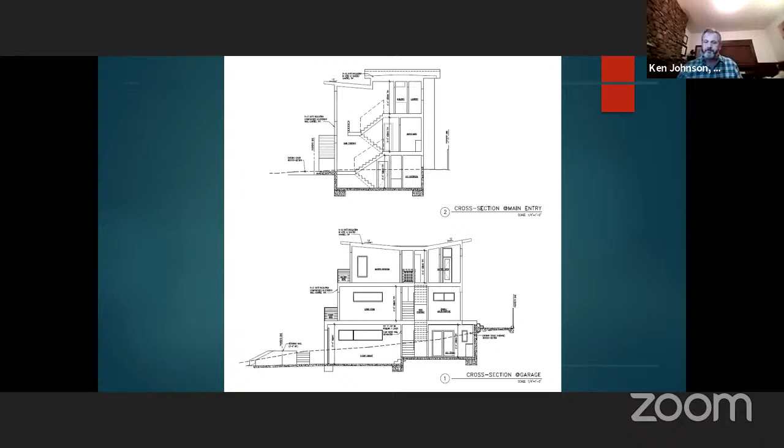As I mentioned, the ADU would also be at the basement level, and it would require a cut into the slope, but would be stepped up from the garage level, as you can see in this cross section here. So the applicant has proposed the excavation of 365 cubic yards of soil, and that's to be exported from the site to accommodate mostly the driveway, the garage, and the ADU footprint. The front retaining wall within the public right-of-way would be reconstructed, and a portion of it set back about a foot farther from the street improvements towards the house. This just shows an outside view of a couple sides of the house.

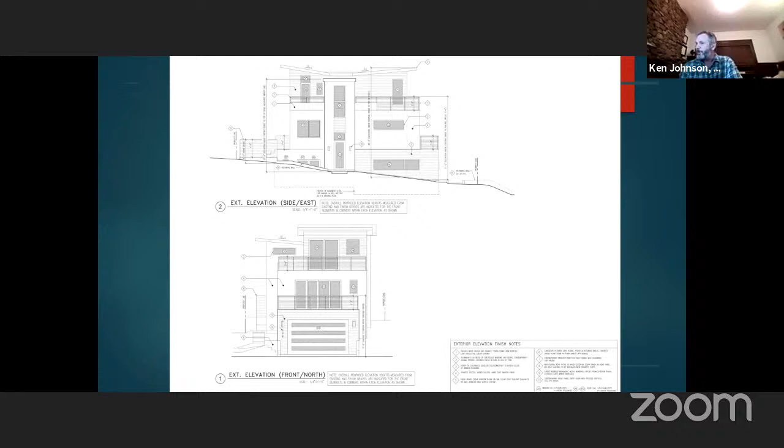The proposal complies with all applicable development standards and would eliminate the existing nonconformity for parking as well as the nonconformity for lot coverage. And that is that it's at 49% coverage, it's over the 40% development standard. The table of the key project data was provided in your agenda report, and the project meets all of the applicable development standards.

In terms of findings, to provide a recommendation to the city engineer, in 2003, the Planning Commission adopted guidelines, which included 4 findings. 2 of those are not applicable since they pertain to properties, in one case within the San Bruno Mountain Habitat Conservation Plan area, which this site doesn't sit in, and also a removal of street trees or protected species or 3 or more trees.

The other 2 findings are that the proposed grading is minimized and designed to reflect or fit comfortably with the natural topography, and the proposed grading is designed to avoid large exposed retaining walls. And the proposal meets both of these findings. There are no large retaining walls. The largest wall would be the reconstructed wall of approximately 3 foot, a little over 3 foot, at the front of the site.

On the finding of grading being minimized and designed to reflect or fit comfortably with the topography, both the garage and ADU would be within the cut area to be partially below grade. So this modestly sized house would be nestled into the lot. The topography outside the footprint of the house will be largely unchanged. Grading is also minimized as appropriate to meet the height requirement of the house of 28 feet and is stepped up to the rear of the lot in the ADU area.

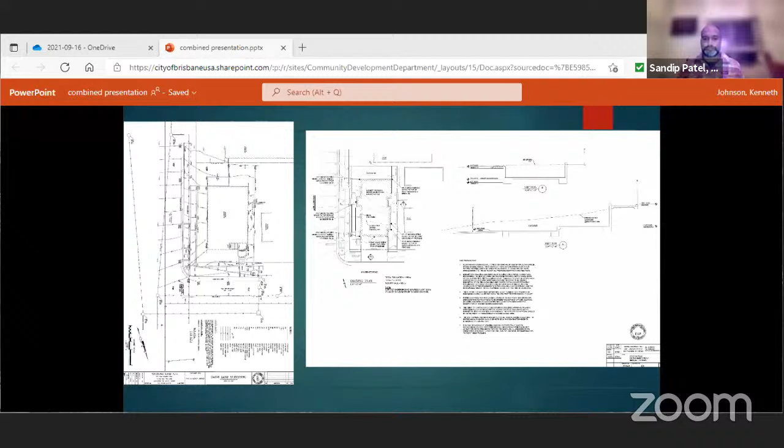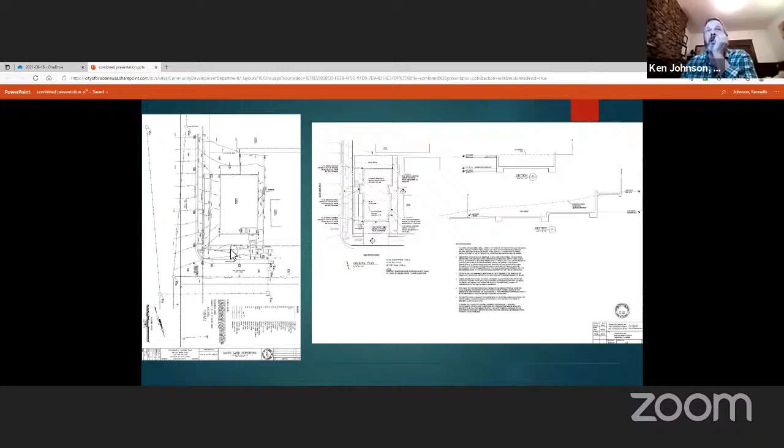All right, so can you see the screen share now? Yes. So the property line is here, where my cursor is. The existing wall is out at this light colored line here. This is the existing site plan. And so it's going to be shortened because you'll have the cut for the driveway, and it's going to be pushed back about a foot and a half, roughly. So it'll be a little bit closer in. Do you know approximately how many feet it goes into the public right of way, if you had to estimate? I believe it's about 2 feet. Okay.

So Pamela, I understand what you're saying. I do agree that we need to be consistent. My analysis was that property with the non-conforming garage seemed to be a completely non-conforming structure that wouldn't be approved today at all. They were rebuilding a house and leaving sort of a shack on the property because they didn't want to build a garage into their plan. Versus this, where there's a retaining wall 2 feet into the public right of way, which may not even be there if the engineer says they need to move it or fix it.

But the entire building and all of the structures where anyone would be or put a car is conforming. And the driveway, I don't think they need that sentence in the agenda materials. The parking does comply with what's required of that structure. If they hadn't put that sentence in there, it's an issue with any driveway in Brisbane. Yeah, I tend to agree. If the development itself is conforming, I think our jurisdiction about that kind of stops, because this is coming before us on a grading permit, not a building permit or design plan. True.

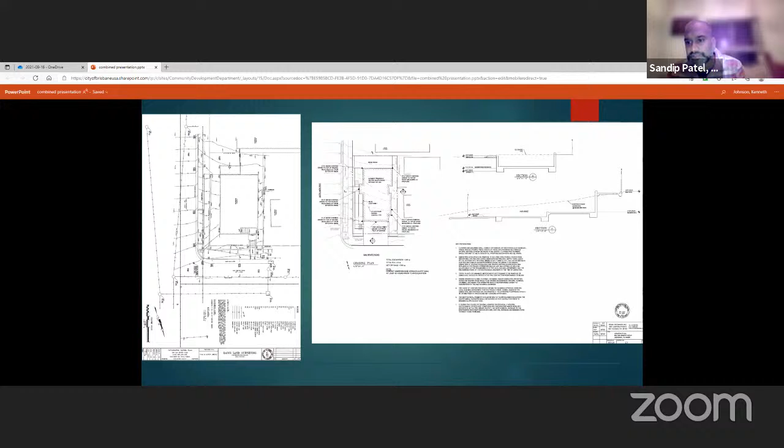I don't disagree with your concerns or the problems we have on these narrow streets. I just think the way the grading permit review criteria are written, we don't really have the latitude to act when the property is otherwise conforming. Right, I would just add that the consistency comes in because we have to address public health and safety. When we were looking at the Yu project with the non-conforming garage, where there may be people or things inside, there's a public health or safety issue.

I do agree that parking cars in driveways and making people walk in the street is a public health and safety concern, but I think that's a universal Brisbane issue and not just this particular property construction issue.

Yeah, and if I can add one more thing, I think staff and council and other folks are aware generally of issues that exist around the current criteria for grading permit reviews by the Planning Commission. And I think this permit application just highlights one more time what the issues can be that require some review and some consideration about tweaking those. But I don't think that this particular project can be held up under the current standards that we are laboring under.

Okay. All right. Where are we? I believe we've closed the public hearing. So now may I have a motion to act on this item? I'll move. To do what? Can you state your motion? Sorry, I'll move to approve 2021-EX-3. With the adoption of the proposed findings, I assume.

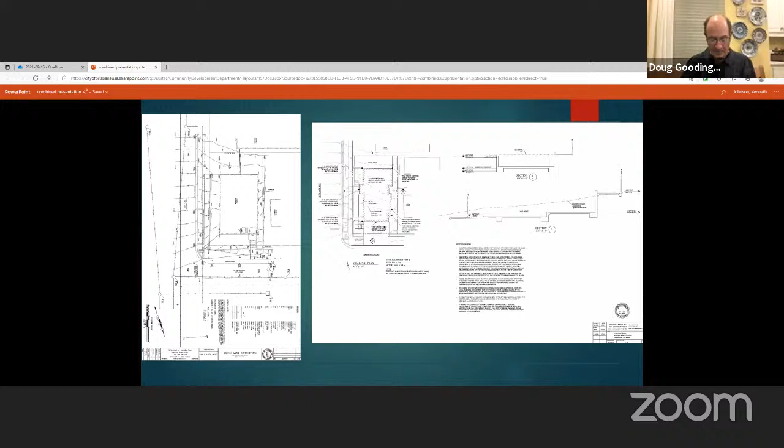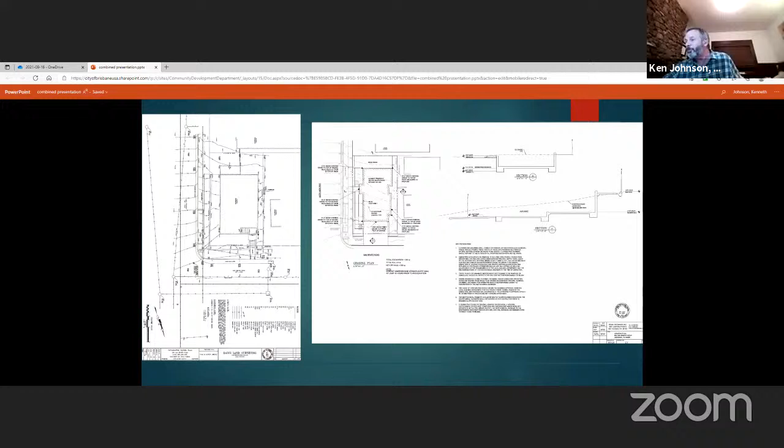Staff, we have one more item on the agenda. Actually, one more item, and then the presentation. Yes, so I want Commissioner Gomez to come back. I might text him real quick. Yeah, are you guys hearing me? Yep, okay. I think I had a similar issue. I got blacked out here. And I can't seem to turn on my camera, but if you can hear me, I'm here. All right. I can hear you. All right. And can you all see my screen? Yes, okay.

All right. So this is a city-initiated action. The request is that the Planning Commission adopt a general plan conformity resolution declaring that the Toll Brothers' transfer of ownership of certain real property to the County of San Mateo and to the City of Brisbane is in conformance with the city's general plan. The subject Toll Brothers owned property, Northeast Ridge parcels B, C, and F, are located between the Northeast Ridge housing development and Guadalupe Canyon Parkway, and together they comprise approximately 136 acres.

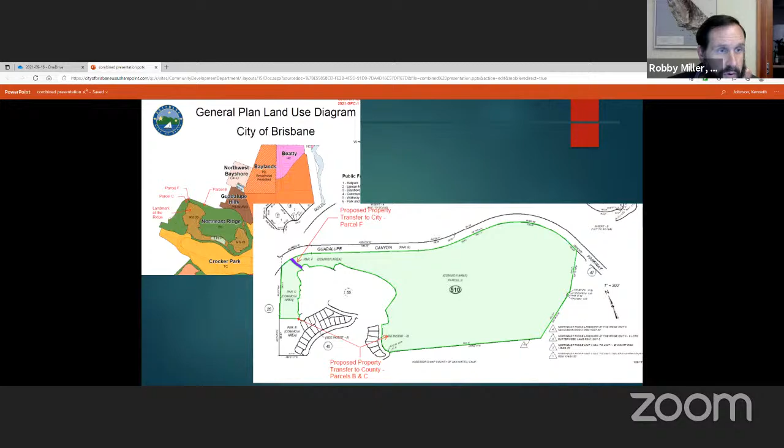Okay, it looks like we have one. Barbara Ebel, I'll give you, is it 2 minutes? 2 minutes, and you have starting now.

Sorry, I was actually just trying to get Robby's attention so we could try to get set up for my presentation, but the chat is disabled, so I didn't really have a way to do that. Sorry. That's all. It's not actually a comment about what we're talking about. Do you have my number? It's on the screen. Just text me. Okay. Text me or, yeah.

So going back, is there anyone else that's waiting for public comment? Not at this time. Do we have to put a screen up and wait, or have we been doing it because we've been doing it? We can pass that. So a public hearing is not required, but I think it's good form to go ahead and allow public to chime in if they would like to. We've been probably waiting about a minute or almost 2 already. Okay. Maybe another minute. Okay.

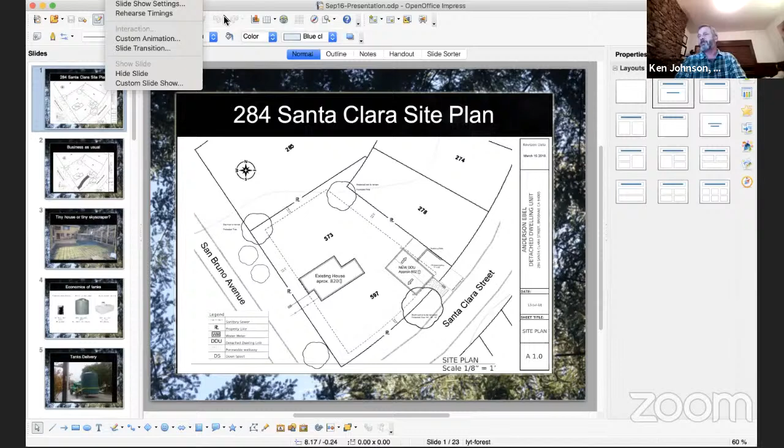Thank you very much, Sandeep, for filling in. I think that brings us to our next item, which is a presentation by Barbara Ebel about ADUs, correct? Yeah. Staff, is there anything else that we do in between this and Barbara's? No, I don't have the agenda right in front of me, but my recollection, we went next to Barbara's presentation, and I believe she's going to present for 20 minutes, and if there's some Q&A afterwards, we'll take that, or I'll leave it to Barbara if she wants Q&A in the middle. Sounds good. With that, Barbara, let her rip. Only if I don't have to stick to my 20 minutes. Tick tock, tick tock. All right.

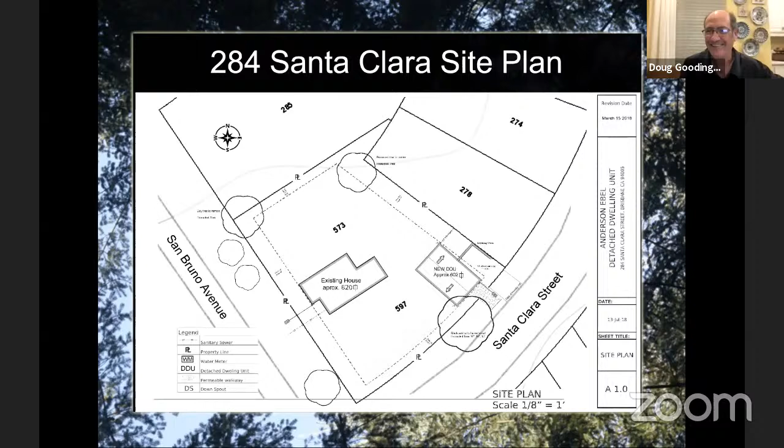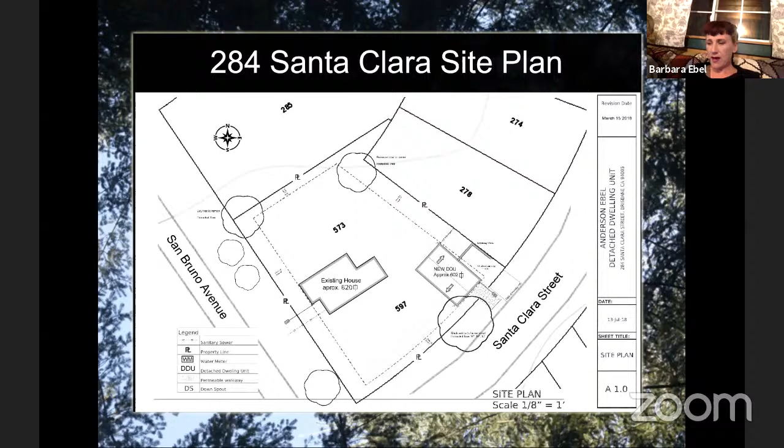So our goal tonight is to educate and inspire. What does a green building look like? And the answer is it looks like any other building. The difference is in how it works and what goes into it. Let's start from the ground up. Our first big decision was to situate the building in the northeast corner of the lot, leaving as much space open as possible. Our contractor said the most cost-effective approach would be to create a driveway near the corner of the lot and have the garage underneath the house. This would have turned a large portion of the area into a driveway and left us with a useless 5-foot pit on the far side of the house.

So instead, we changed the design from a one bedroom to a studio so that we could use an uncovered parking space within the setback. Although we also had the option to request a variance from the city, we decided not to go this route because we felt that an off-street parking space was a valuable community asset. We wanted to provide space for an electric vehicle with a charger. With transportation accounting for 40% of all emissions, eliminating off-street parking is an impediment to electrifying transportation, as people cannot buy an electric car if they do not have a place to charge it.

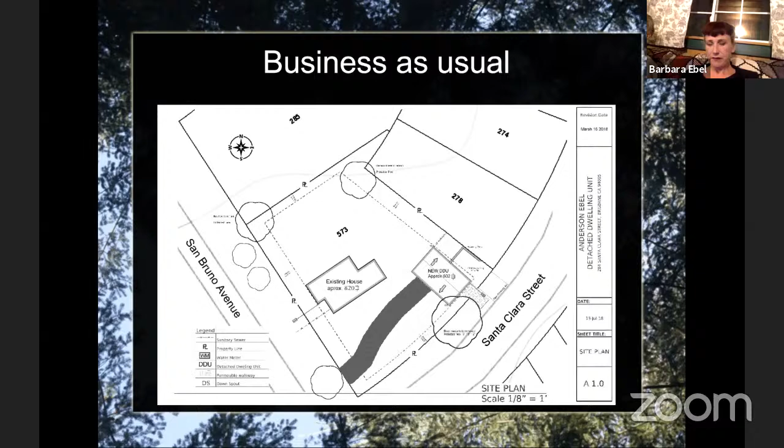Next is the foundation. We designed our project to contain two 4,000-gallon rainwater tanks. Tanks of this scale are needed to provide water. Honestly, the 65-gallon rain barrels are kind of pointless. Not to be discouraging, but they provide less than 1/10 of a unit of water. The average Brisbane home uses 1.9 units of water per person per month. So maybe doing some guesswork, 1,400 gallons per month.

The engineer required our slab to be 18 inches thick due to the weight of the water tanks. While the tanks have a loaded weight of 43,000 pounds, they also have a 57 square foot footprint and aren't actually that much heavier than a water heater. It did not seem to me like the 18 inches of concrete with a double mat of rebar was truly necessary. And I would like to suggest that the city prepare a guidance document on slab thickness for a couple of different tank sizes. This could go a long way towards making it simpler and less expensive for people to install these types of very large tanks as part of a project or standalone.

We considered other options for our tank placement. We wanted to put them under the parking pad, but that would have put them within the setback, which isn't permitted. One of our contractors suggested we switch to the underground tanks.

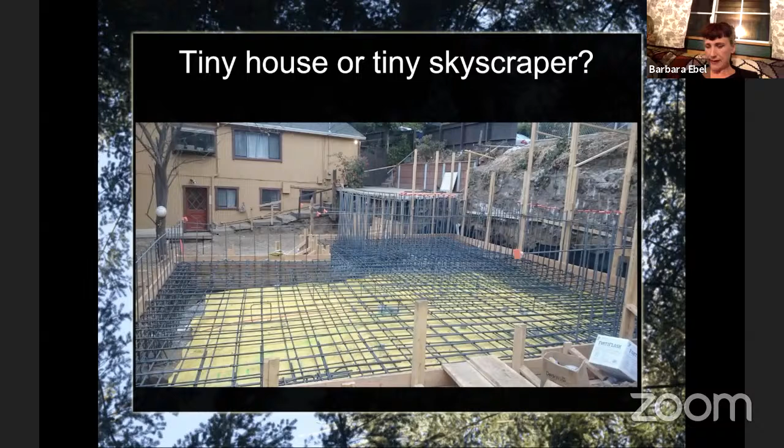However, underground tanks have to resist soil load and the possibility of collapse and resulting liability and are much more expensive as a result. Size also makes a difference in the costs of tanks. For example, a 50-gallon rain barrel costs $100 and pencils out at $2 per gallon for storage. The 4,000-gallon tanks we purchased cost $1,800 and cost 45 cents a gallon.

An underground water cistern of similar size would have cost around $12,000 and come out at $3 a gallon, over 6 times the price. The city could consider adding an exemption for rainwater catchment within setbacks to ease the placement of large tanks.

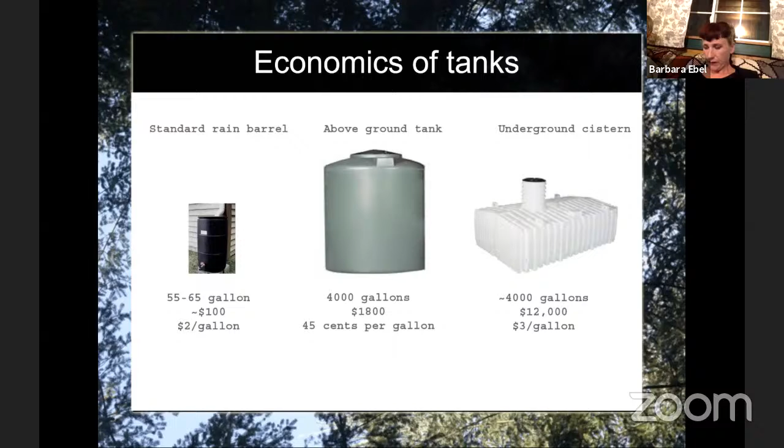Because the house was actually built around these two 4,000-gallon tanks, we couldn't apply for the rebate until the project was completed and the rain barrels were functional. We were technically outside the rebate window, but we were very fortunate that BAWSCA and the city decided to honor our rebate. So a longer timeline for very large projects might be useful in considering the adoption of these large tanks.

The formwork was all done with 2x12s. These were then afterwards ripped down into 2x6s, which were used to frame the building. There was still a lot of lumber left over after construction, but the majority was sold. Some of the leftovers were sold to use as forms again by a man who was rebuilding his home after the fires in the north. More was sold to someone who needed to redeck his trailer.

Much of the 2x4 stock went to someone named Joy Lamb, who used it to build a tiny house. Some of the remaining also built shelves in somebody's garage. All in all, the lumber from the forms built 2 houses, a second foundation, and several other small projects. All of this material was diverted from landfill.

This is a good segue into what it took to build a zero waste project. The first step was to not get a dumpster. A dumpster is an invitation to just throw away what you have and get something new. The second thing I learned was to put the new lumber really far away from the work site and to place the sorted scraps in between the new lumber and the work. Even this measure was not enough at the time.

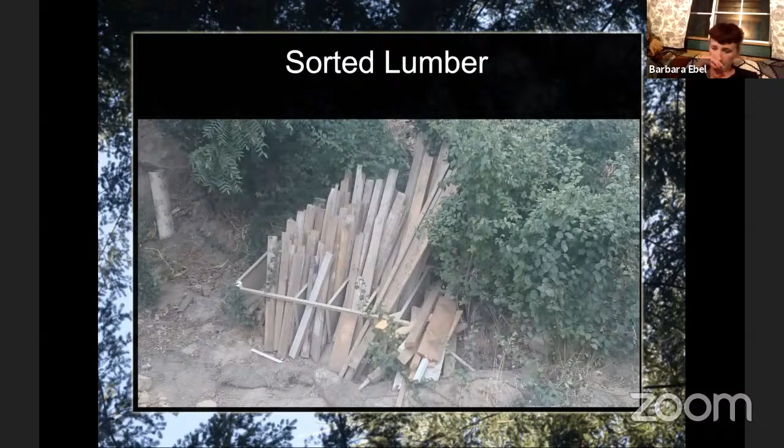Building 24 inches on center was simple for me because I'm not habituated to building 16 inches on center. It was hard for our contractor. Biggest upset came when the engineer used boilerplate design and laid out the hold downs at 16 inches on center, even though the framing was 24 inches on center, so that some hold downs ended up under a stud and had to be re-drilled and epoxied.

A bit about advanced framing technique. The top of the picture, this is standard framing, and the lower half of the picture is advanced framing technique. You can see it's just a lot cleaner looking. AFT has been around since the 1970s.

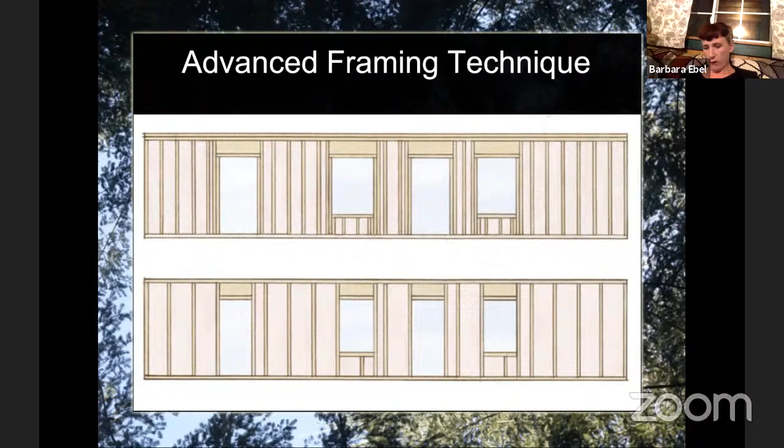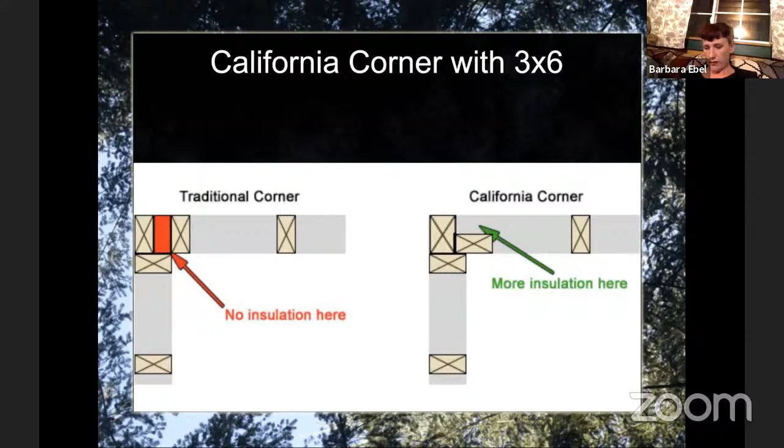We adopted the standard 2x6, 24 inches on center, California corner with 3x6, and the rigorous positioning of windows between natural stud placement. We adopted insulated headers, and we minimized header size on non-load-bearing walls, so we did not omit them entirely as sometimes recommended. All framing is aligned from roof trusses to foundation. Interior walls do not align with the studs, and we used ladder blocking for attachment.

We used ample blocking for fixtures, and the sheetrock went up before the interior walls were framed, providing a thermal break between the interior walls and building envelope. In addition to the use of headers on the ends, we opted to use the double top plate, which is not normally part of AFT.

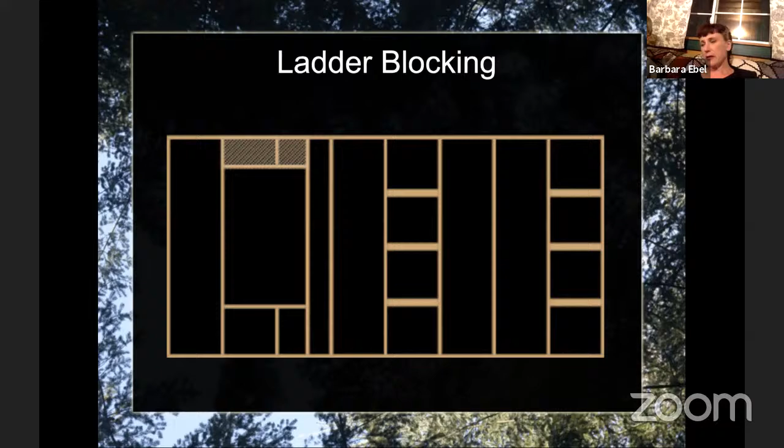While engineering shows that the perfect alignment of studs will transfer the load, doing so left us with 2 problems. First, the length of boards would have required a complicated set of short studs to accommodate bridge blocking. And second, we had not yet contracted the engineering for the trusses, and their attachment was unknown at that point. Our research showed us that truss attachment to single top plate can be problematic and require customized hardware.

There's a widely circulated and much believed misconception that AFT walls have less wood because there are 2 studs instead of 3 per 4-foot panel. The fact is that they have more lumber. In the past, framing was done 24 inches on center, and now it's done 16 inches on center, so it became necessary to add a third stud.

So you can see here the original with 2x4 dimensional framing, it's 16 square inches of lumber per 4-foot wall. And then when we went to 3 small studs, it became 19.25 square inches of lumber per wall. But the AFT with 2x6s actually provides 22 square inches of lumber per 4 feet of wall.

In conclusion, advanced framing technique saves money, not because there's less material, but rather because there's less wastage and labor. It offers small improvements in a number of areas, such as 38% increase in space for insulation and reduced thermal bridging.

The biggest disadvantage we see is the rigid nature of the structure removes all creativity and joy from an architect's job. AFT has never caught on because it's bad at building very articulated buildings that are fashionable. But it's really good at building ADUs, and I hope we see more of it.

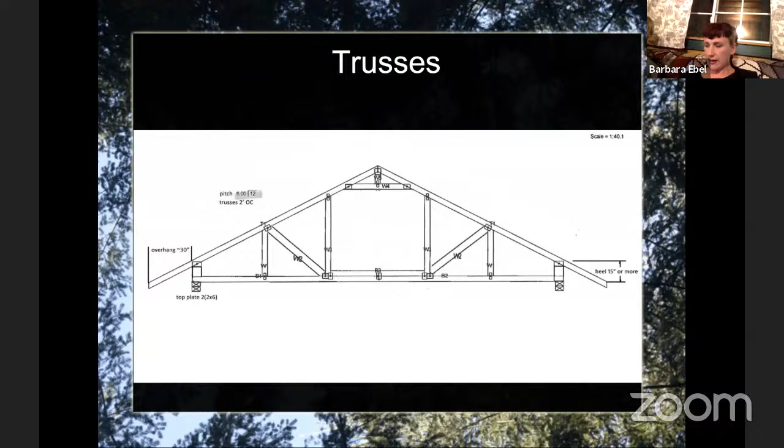There's a magic point in space outside the building envelope where the eaves will allow full sun on the sides of the house in the winter, but also completely shaded in the summer. We were able to hit this magic point in space because of the raised heel trusses. Honestly, I don't think anything should be built in this climate without raised heel trusses.

But most projects won't put them in because they take up additional vertical space, and it is common for new projects to use all allowable space within the height restrictions. Planning Commission or City of Brisbane could consider reducing the height limits by 12 inches and adding an automatic exemption for raised heel trusses. There's a reason raised heel trusses are the darlings of the green building professionals. Encouraging their use would result in greener building stock.

We also use R38 under the floor.

Yeah, okay. Too far. You confused me. Sorry.

This allowed us to reduce our wastage because we were able to double up with the attic insulation and also ensured a comfortable draft-free floor, which greatly influences the occupant's perceived room temperature. I feel it's often overlooked because heat rises and very little is actually lost through the floor. The building is currently speccing out at about 18% above code.

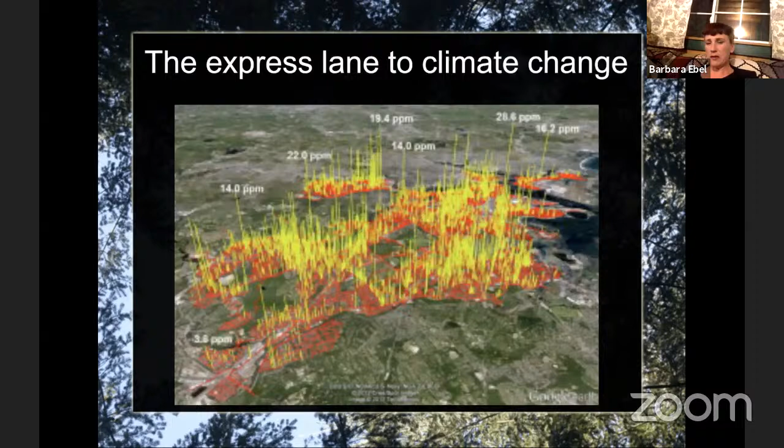Okay. So, settling on all electric appliances rolled into our choice for solar panels. Rather than installing the 1 kilowatt system required by the Brisbane Reach Code, we did some guessing about what our tenants might need and settled on 1.6 kilowatts. The Reach Code did exactly what it was supposed to do. Because we had to put in solar anyway, we put in a bit more to meet the needs of the building. Last time I checked with our tenants, their electric bill was running around $12 or $15 a month.

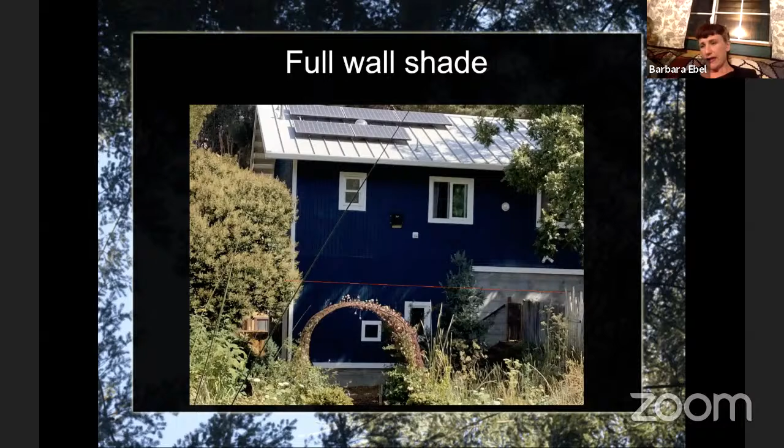By the way, this picture was taken about noon, and you can see the red line, how far down the wall the shade goes. In addition to some unique framing details, we also kept the electrical panels and plumbing outside of the walls as much as possible to preserve the integrity of the insulation. The one place we did have a bit of trouble, though, was with the main panel, which was surface mounted on the exterior of the building.

The surface mounted box had places for bringing in the conduit on the top and the bottom, but we wanted the outside to look clean, and we wanted to bring everything in the back of the box. Our electrician said that he could drill holes and buy fittings, so that's what happened. The inspector came by and said, no way, all the holes had to be plugged up, and the electrician was flummoxed. Apparently this is done all the time, but not today. We had to reroute all the wires to come through the wall below the box so that they could enter through the manufacturer provided punch outs.

Once done, the inspector told us we could either use a metal or wood enclosure to protect the wires. We couldn't find a suitable metal enclosure that wouldn't have required heavy modification, so we chose to use a wood enclosure. During the final inspection, though, the inspector didn't agree with this. So we got into a bit of trouble. Ultimately, the wood enclosure was approved, but it was pretty uncomfortable for a while.

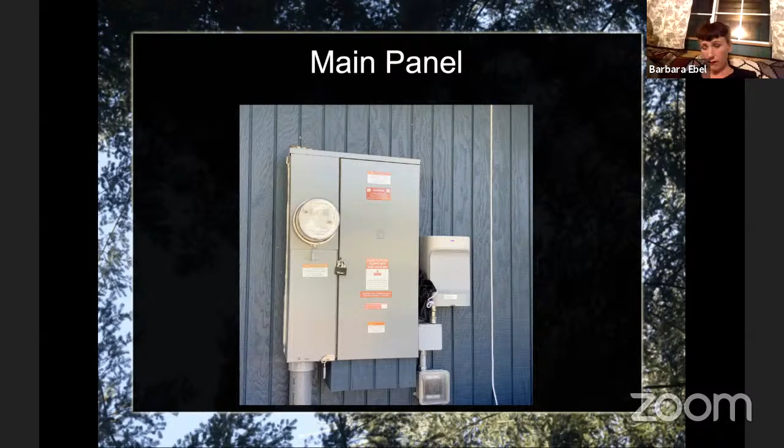As preparation for this project, I took a number of classes through CCSF, and I also took as many of the BayREN workshops as I was able. One of the things BayREN staff talked about was the movement towards punch list inspections and the resistance of old school inspectors to that. I talked to some other people who have built in town and other cities, and they all agree new construction is stressful.

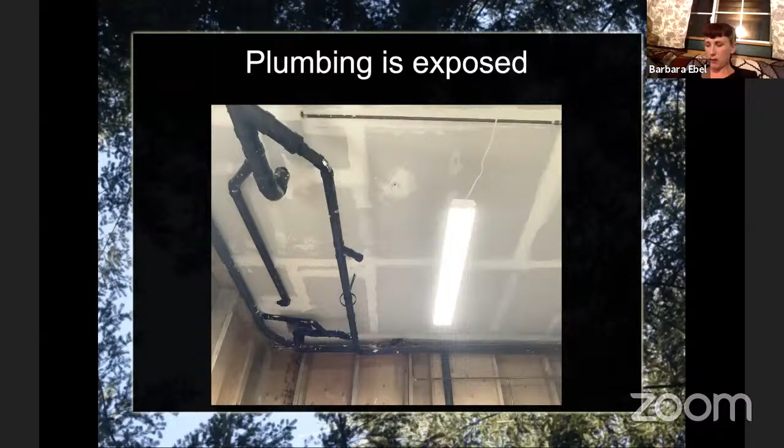New efficiency codes are a small burden that provide important community benefit compared with the stress of personalized building inspections. My recommendation is that the city of Brisbane move to the forefront of the building inspection field and do the most important and cost-effective thing you can do to ease the construction process by either working with CSG or contracting a new company to provide punch list-based inspections.

One of the first things you notice about this home is the large walnut tree. We wanted to keep it, but we knew we might not be able to because it is very close to the building site. Various people stopped by and said they hoped we would save it. We lose an average of 2 large trees per month in Brisbane and didn't want to be part of the arboricide. Because the corner of the property was almost a cliff and there was an old retaining wall between the tree and the building site, we only needed to do very limited excavation to place the foundation. In the end, we were able to save the tree with only limbing.

One of the last things we did, however, was to install the sewer connection. I told them we were keeping the tree and to dig around the roots, and heaven help me, I went home to go pee. And when I came back, there was a log-sized chunk of root sitting on the ground. The upshot is that we had to take liability for the tree from the city. I'm grateful that the city allowed us to do this, but who really should be responsible is the crew who cut the root. Black walnuts are exceptionally tough.

But if we do have to remove it, the $5,000 sewer connection will cost us an additional $5,000 in tree removal. Construction-related root damage was the reason the iconic tree on Paloma had to be removed and may cost us the heritage oak on Kings. It's my most heartfelt request that the city require the text about tree protection zones to be added to every page of the building plans.

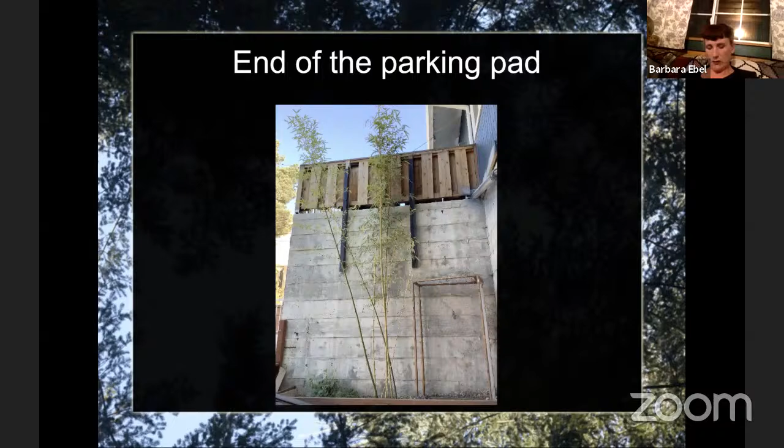Last of all, we did it. We were inexperienced, and twice we hired the wrong people. We took over as our own general contractors. We built something that conventional wisdom said would not pencil out. We built this crazy parking pad using non-standard construction details, exceeded Title 24 by almost 20%. We looked beyond our pockets and kept the community and occupants in mind. We built a building that would take care of people and not put demands on its occupants or on the environment. We built to the highest standards on the smallest footprint, and yet we believed we could turn a profit.

So the last thing I want to leave you to consider is that when developers come in here and say they have to have this or that, or they cannot make a buck, consider not listening to them. It's just code for a slightly smaller profit. Look at the big picture. Look at how the building is going to impact the community, the city, and the environment.

Developers are here and gone. Residents stay for decades, sometimes longer. Houses often stand for 100 years. I don't want to be special. I want this to be normal. I want you to make an impact on our future, and I hope you will consider some of these recommendations.

And then just the little building facts here, which I wish I had put up on a slide, but I didn't, is that it's a 560 square foot studio with R38 in the floors and ceiling, R31 walls, LEED compliant cool steel roof. Most fixtures were salvaged secondhand, returns, dead stock, and open box. Low E windows with an

R4.3, Energy Star doors, Greenguard flooring, built-in heat recovery ventilator, low VOC paint, full basement, partial attic, EcoBatt formaldehyde-free recycled fiberglass insulation, R7 pipe insulation, off-street parking is EV ready, 1.6 kilowatt solar array, 8,000 gallons in rainwater storage, 100% LED lighting except for the heat lamp in the bathroom, Energy Star induction stove,